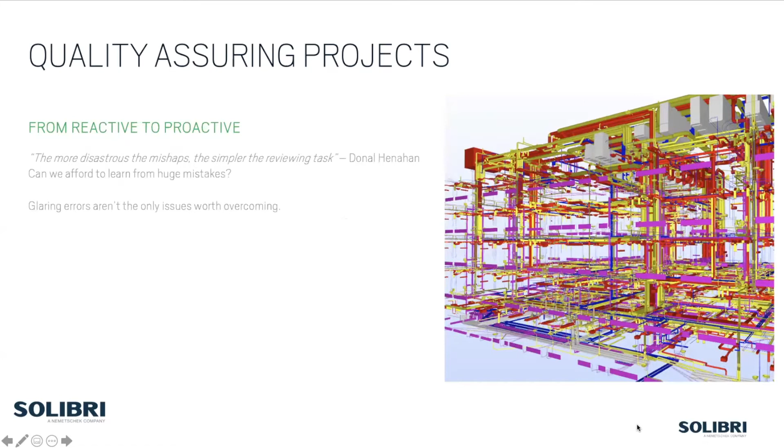From a reactive mentality to being proactive with quality assuring projects - a general quote to share with you: the more disastrous the mishaps, the simpler the reviewing task. But to counter that and to challenge that, can we always afford to learn from our mistakes? Glaring errors aren't the only issues worth overcoming. And is it too late if the mistake's already happened?

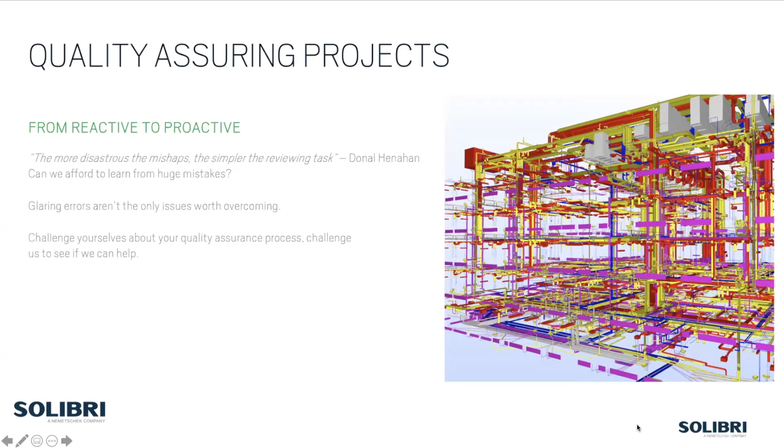So we challenge ourselves about our quality assurance processes, and then challenge Solibri to let us know and we'll tell you if we can help you. When we prepare for the different stages for deliverables, such as COBie, and calculate how much time is used to repeat the same issues across multiple projects, when we actually recap on our previous experiences, just consider the way that we can be better moving forwards.

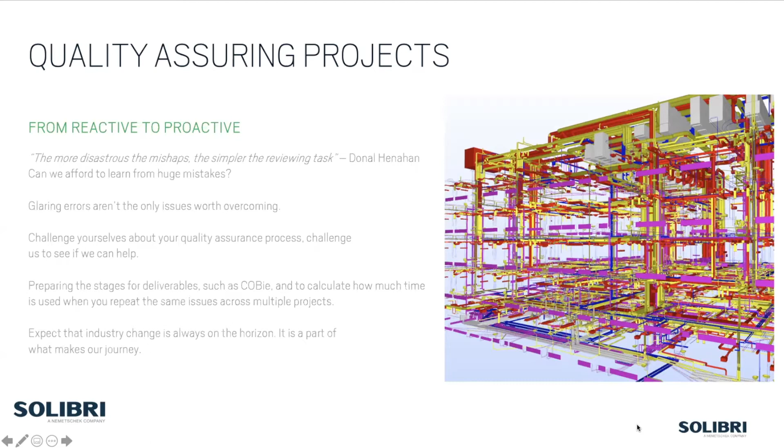And change is always on the horizon. It's a part of what makes our journey. This industry is ever evolving, and always consider that change is on its way.

In the world of BIM, we are creating more data than ever before. If the data is not correct, we are potentially creating more problems than we're solving, and BIM cannot deliver on its promise. I read that word for word because it's a powerful statement, and it really is that simple.

So without further ado, I'll move over to Simon, who's going to showcase and demonstrate just how this works within Solibri Office. Okay, thank you, Isaac. And there we go. So we should now all be seeing the Solibri model checker on the screen.

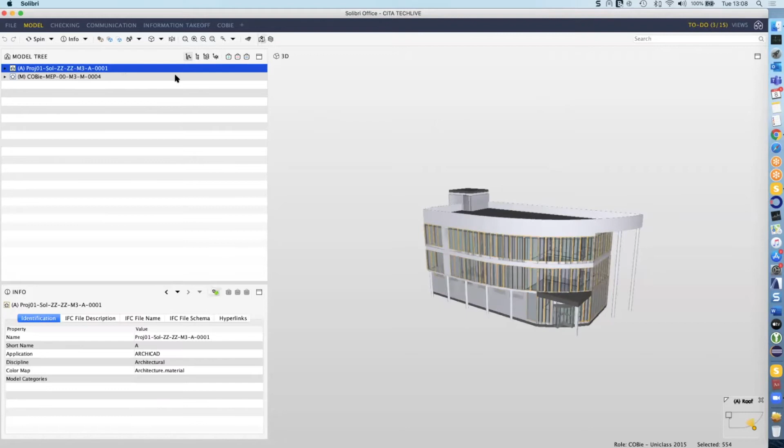What we're looking at now is the building information model. We have two models loaded here: one is the architectural model and another is a mechanical model. So the architectural model is that set of components, and the M&E are those set of components. It's a simple basic model to show the functionality of the Solibri engine.

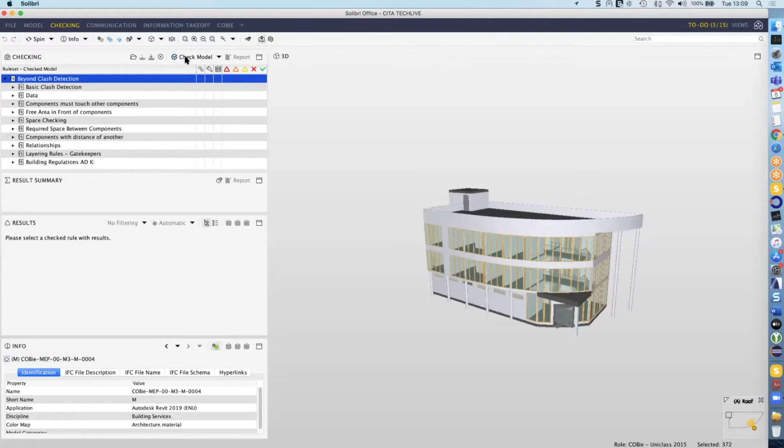It has data related to the components, and when we move to our checking area, we have a list of checks that we can actually carry out. To check the model, we click on the check button at the top here, and it then executes the rules that we have defined within this project.

So we've already discussed—Isaac's already mentioned—about clash detection. Clash detection within Solibri gives us the ability to do things like duplicate checks, to ensure you don't have the same kind of components sitting over the top of each other, as well as components that sit inside other elements.

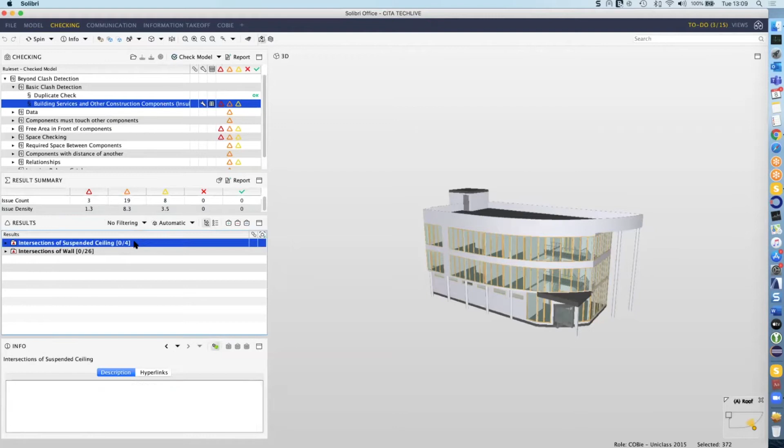But generally, we also have the ability to start looking at, say in this case, building services and other construction components. So a typical clash—when I click on the overview level at the top of these issues, we see all of the data related to what's in this section. So this is all the items related to the suspended ceilings, whereas these are all the items related to the walls.

Now, this gives us an overview against the issues that we're looking at, and we can then drill down into the individual cases if we want to.

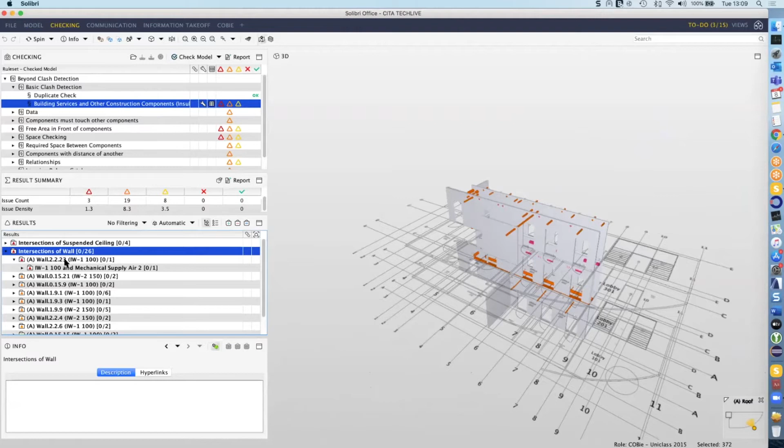So we can go down to one of those clashes here, and when we get down to the level of the triangle, which is the actual issue itself, it then lists the components that are the problematic items. So here's our wall, and we have a couple of duct fittings that are going through that wall component. Now, we also have what's called related components.

Solibri actually has relationships. Those are defined within the authoring system, but come through via IFC to add a much richer view on the model itself. And we'll see how that affects the ability for us to use that within rules as well, later on, using fire ratings.

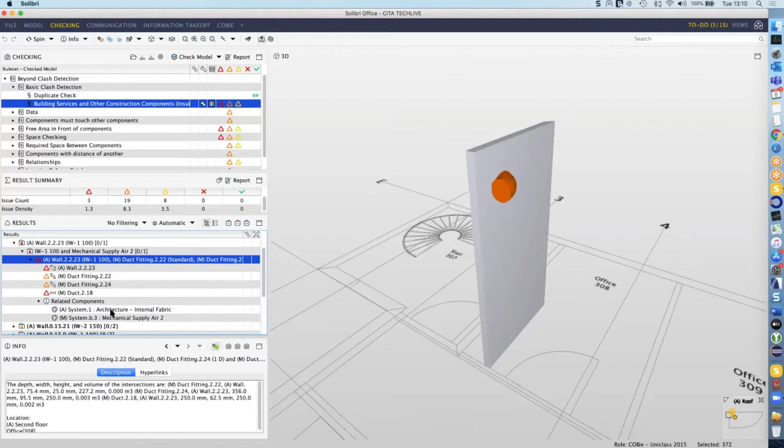So here, what we can do is see the context of the system of where that duct actually clashed with that wall. So we're not just looking at the information as far as an individual clash in the building where it exists, but we can actually start using these relationships to embellish or improve the understanding of what's actually happening within the model.

We also discussed project deliverables, and most of those start off with either clash detection, here from providing a coordinated building, also the ability to then check data. So one of the first things that people need to go and check is that the actual model files themselves conform to ISO 19650.

So we have a rule that we've created here using one of our rule templates, and the rule goes through and checks to see whether our models—which are these two here, with the naming of the models here—conform to that standard.

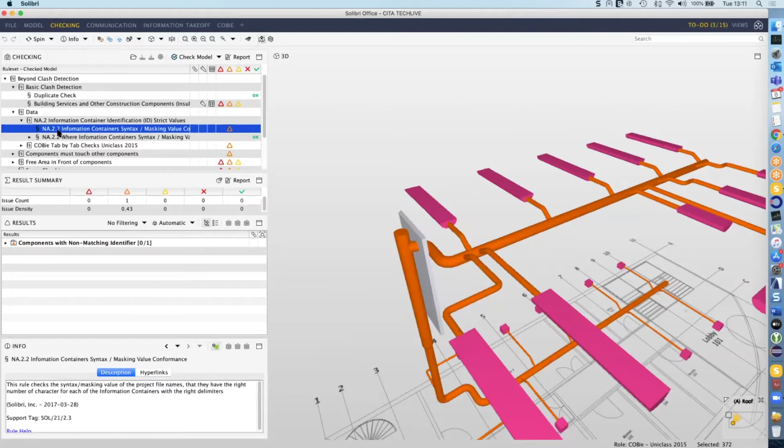So what we've got here is the national annex for the UK, and this is 2.2, and here we're checking the masking value. The masking value says basically that this MEP-based model doesn't conform to the syntax that we've got set up within this rule. So the rule has passed one of these models, and the other one has actually failed.

And then from there we can pass the passed model into the subsequent checks, to make sure that although it's passed the individual syntax—the masking values—each of the individual values that make it up are also correct. So here we might look at something like the available roles, and if we look at the parameters for this, you can see you can then put the allowed values in here.

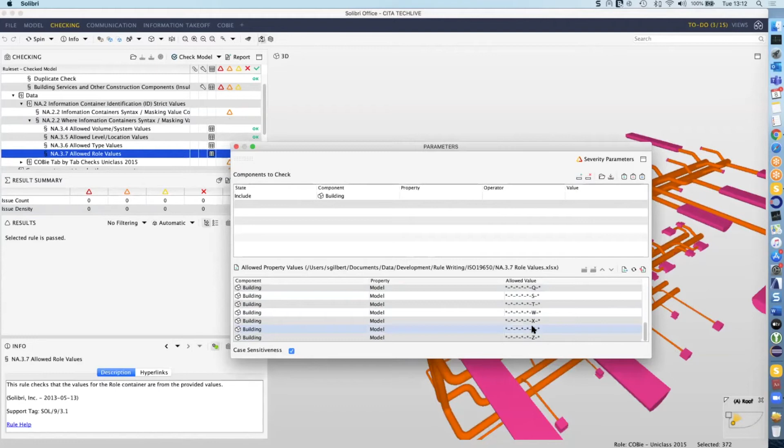We can load those up from a spreadsheet and update them relative to the actual project if needed, adding two figure values and two character values for project requirements. That's data at a very basic level, which should be checked on every project.

A good example of checking other data would be for COBie. In this model we have COBie data, and we've taken a couple of fields we might check for COBie deliverables. One is that it should have an asset type, so we have a rule that checks the values are either fixed or movable for items of this parameter.

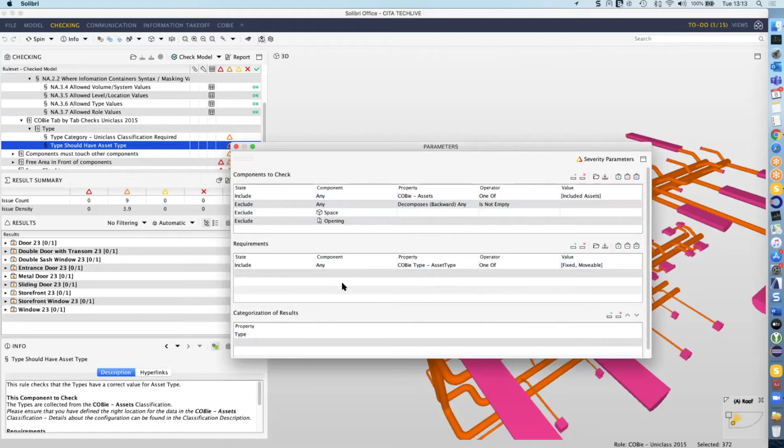We're checking all the COBie assets in the project, filtering them by type rather than individual components. So what we have here are all the elements that don't have the asset type set to either fixed or movable. These are incorrect values at this stage.

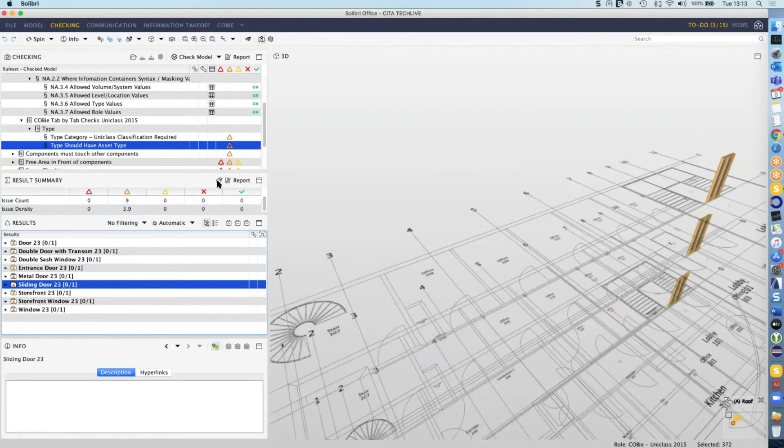For any rule inside Solibri, we get the failures but also the passed elements. The model has checked 208 elements, and you can see it's passed these 56 here. If we select them, these are the components that do have fixed or movable elements against them, so we can interrogate each rule to see what's going on, including the passed ones.

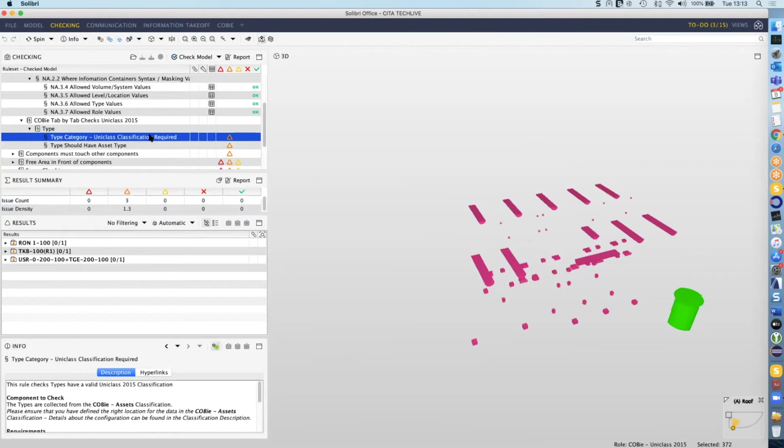This is relatively simple because we're checking a field value that's passed or failed. If I go to something like Uniclass, where we're checking for a classification system applied to components, we check the same set of assets but for this classification. It must be defined, and we sort the issues related to type.

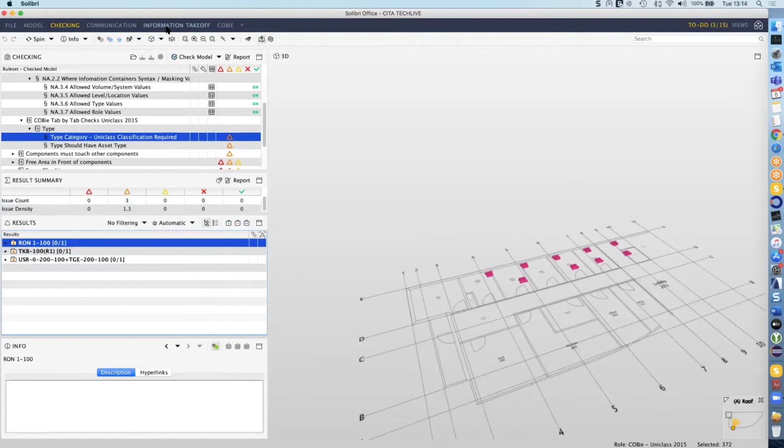You can see it's already failed, and we have three sets of components sorted by their types that don't have a Uniclass classification. That's controlled by our classification functionality, and if we scroll up we have one called COBie Uniclass. If we look at the list that have been classified, these are items that passed because they're defined, and these are the undefined sets of elements.

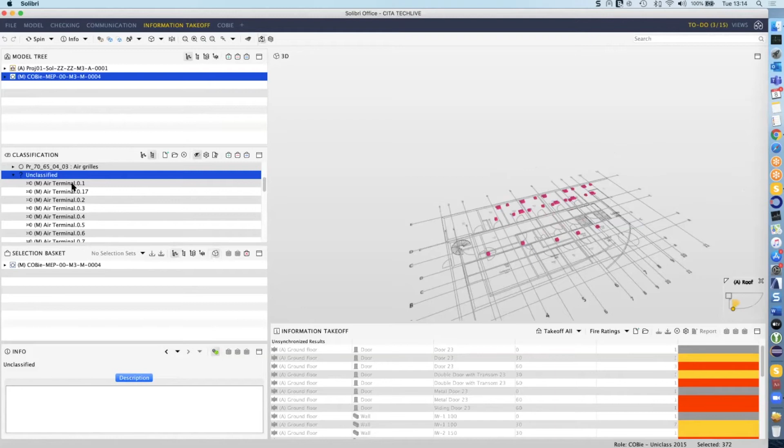The list here is singular and will list each component of those types. But we don't want to create a slide for each issue, because realistically we've only got three issues, as we've already seen. The classification works by checking the set of components, not the whole model.

It goes down these values and evaluates whether it has this as a PR value. When it finds this within the locality specified at the top, which can be changed, it then gives it the actual classification name, so we know it's correct and conforming to the pick list value.

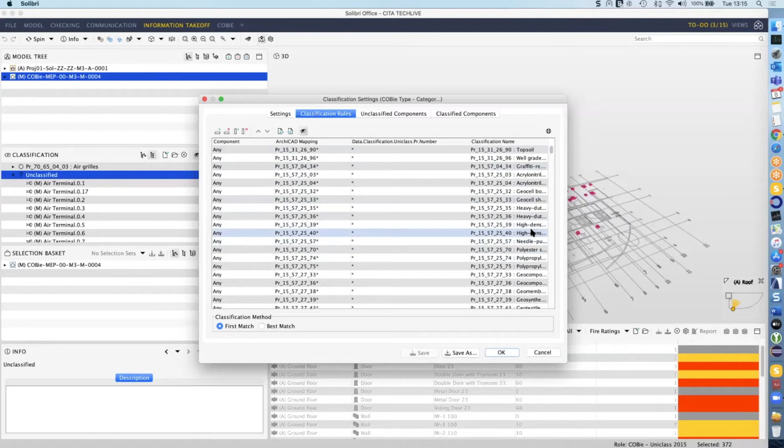Going back to our checking area, we've got our three sets of issues. If we wanted to create slides of those, we can add a description and specify who needs to fix that, and we can do the same for each of these in the same way.

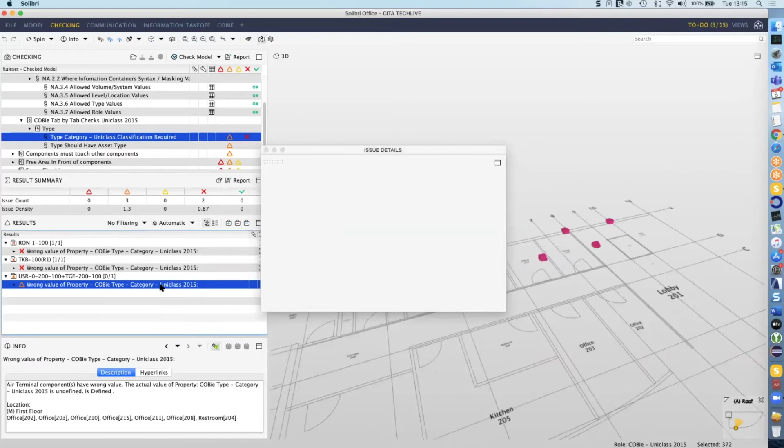With Solibri Office, since we're running this here, you now have auto run available so you could create these dynamically, and we could also generate the presentation dynamically from here as well.

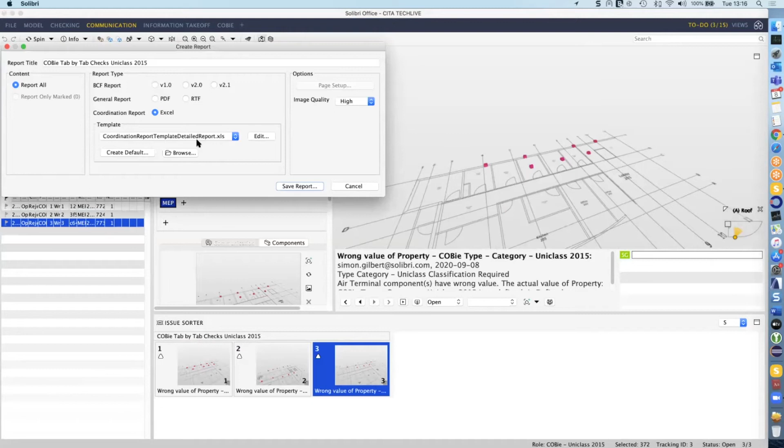So we'll just create the presentation. It creates the three slides here, and automatically we can either synchronize them with an issue management system, report the data out to a BCF report, or generate a traditional styled detailed report just in Excel, which would list that data.

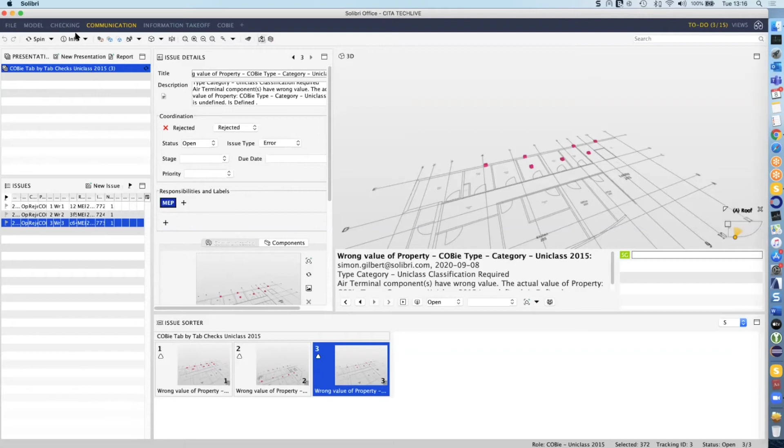So that's the process, and these are linked back to the issue results. When we get a file that updates the model, we should see these being rectified by the relevant consultant, who should have added the PR values for these components as far as the classification. So that's really checking data, and data is relatively easy to check within Solibri, but as we said, it goes a lot further than that.

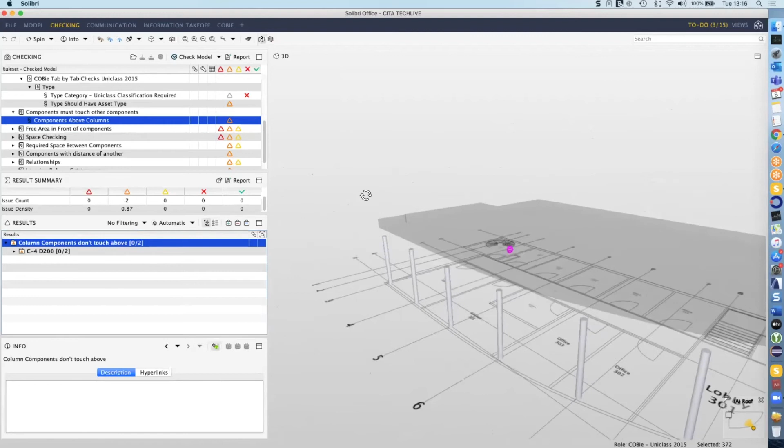We've looked at clash detection, but there are also requirements for certain items to touch other items. Here's an example of a rule that checks that elements in the model must touch other elements. We have columns, and we're saying they must have some kind of bearing object on top of them. This shows us that the columns we see on screen have nothing between them and the roof slab above.

That gap is 450 millimeters. This is also a really good tool if you set the element and the opposing element to 100%, as it can be used as an alignment tool, which is very useful. You don't have to worry about the exact distance, because you can set an allowable amount of overlap or gap between elements. So it can also be used as an alignment tool throughout a project, checking things like columns don't get larger than the ones at the bottom.

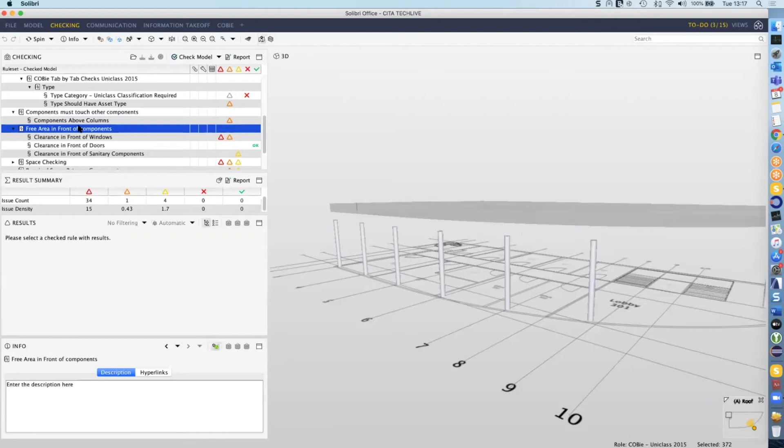So that's checking that things are touching, and now we can move on to checking areas in front of and behind components. We have another rule where we define a box based on the element we're checking—taking the width, length and depth of the box—and we can modify that relative to the original component.

So you can see here we're checking a volume in front of and behind elements. This is incredibly useful for things like doors, where you might have clashes with door swings, service elements, bracing across the backs of doors, or beams cutting across doors—things we see regularly on projects. It's a very useful rule to check we're getting the data correct in the model.

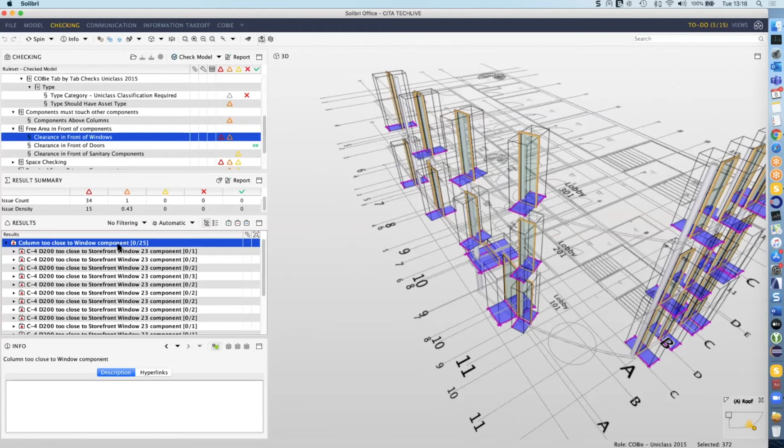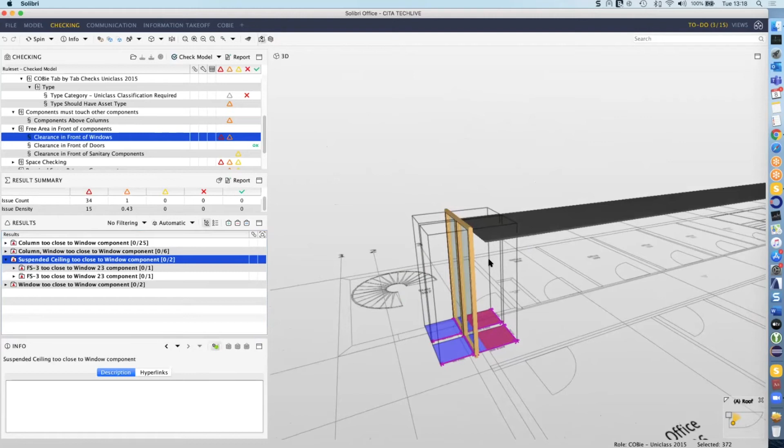A good example is this suspended ceiling, where you can see it's not actually a physical clash with the window units. It projects the amount onto the floor plan to give us a 2D representation of the area taken up by those elements. But if this ceiling was set back a certain distance, we wouldn't see a clash here. It's not a physical problem, but an aesthetic issue—similar to if the windows opened inwards, for instance.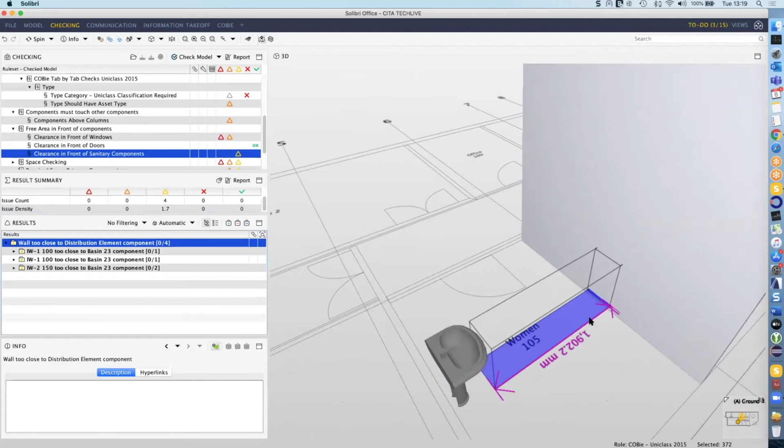This functionality can be applied to almost any element. In this case, I've put a large value in just to show it's checking the area in front of, say, a wash hand basin. It might be an electrical cabinet, or any of those components where you want to check there's free area in front of them.

We also have the ability to check spaces, validating them to make sure the boundaries are correct. In this case, the boundary doesn't match the physical walls around it. That gives us a problem related to volumes, and it would also give incorrect data for things like the schedule of accommodation.

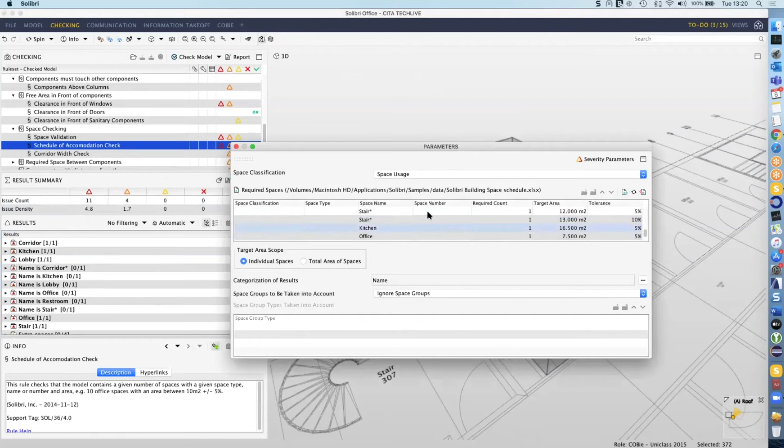We can then run a rule for schedule of accommodation, pulling in an Excel spreadsheet of target values and space names expected in the project, along with tolerances—percentage tolerance or minimum and maximum sizes for those rooms. This gives us a list of failures in the model. For instance, here we have a restroom, and it says there are no spaces of this size, give or take 10%, matching the name restroom.

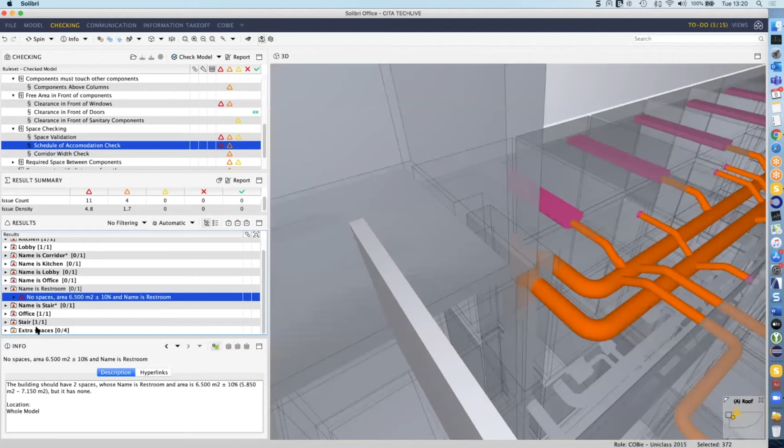That's because down here we have another section called extra spaces, showing men and women. So in this project, where the definition should have been restroom, they've been labeled wrong. Again, we can check that we have the right spaces defined as part of the brief with the schedule of accommodation, just using the rules within the tool and manipulating them.

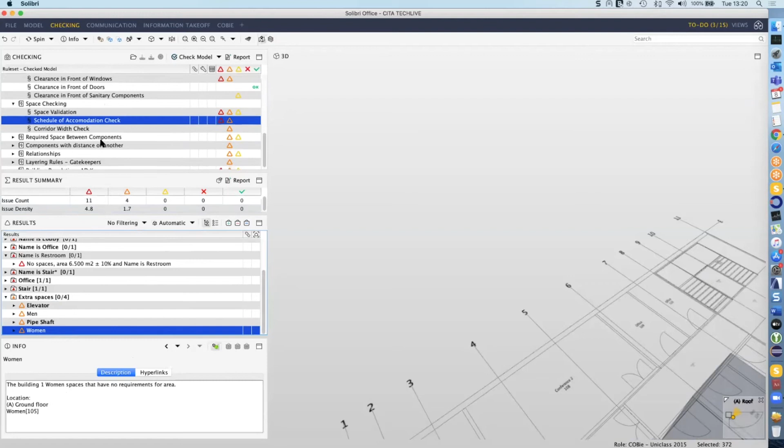Similarly we can check conformance, things like corridor widths—for instance, basic Part M checks. You can see it traces half the thickness we put in as a requirement for corridor widths and puts a boundary around it. Where you see the boundary, that's half the width entered into the rule, and the areas of green are the accessible areas.

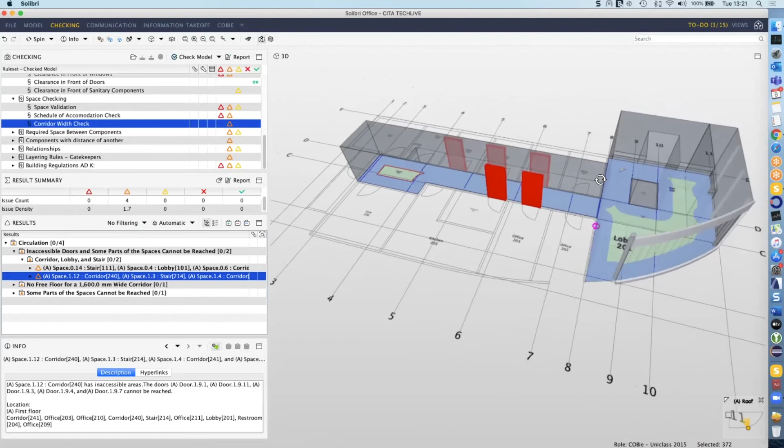What it's actually indicating here is the doors that we see on the floor plan, which are red, are inaccessible because the corridor is too narrow. So it gives us the ability to analyze the actual model. Solibri gives us the ability to visualize the results, not just saying where something's passed or failed, which is really key.

Now we've looked at things like distances between elements, as in items that we actually need, like clear space between elements. In this case here, we might actually require this. Let's look at that requirement - the distance between elements. So what we've got here is clear areas above ceilings.

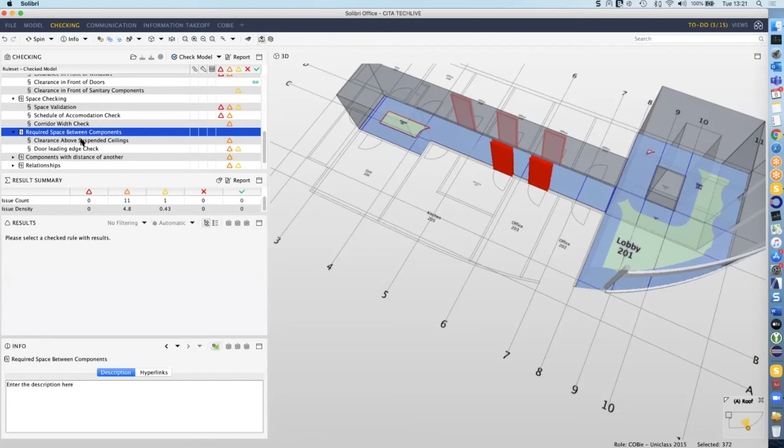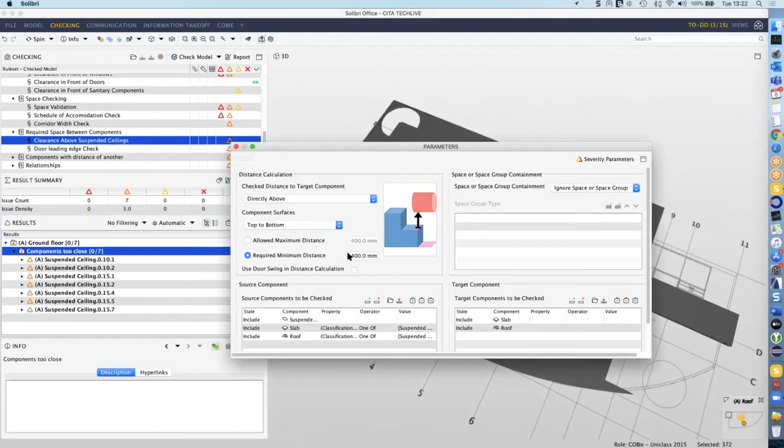If I right-click and look at the rule parameters, what we've got is a rule that checks the minimum requirement. This is saying we need a minimum of 400 mil from the item on the left-hand side, which will be our ceilings, to the actual floor slabs above. We're saying it's going from the top of the ceiling to the bottom of the floor slab, and we need 400 mil. What this is actually showing us is we've got these failures here.

So we've got our floor slab, and if we then rotate underneath the model, we can see our ceiling. There's 7 instances of this, and you can see the minimum gap here is 260. So you might want to combine this rule and say we've got a minimum requirement here, but also change the parameters so that when it gets above 800 mil above these ceilings, we have to check for fire detection devices within that ceiling void area. So we can start stacking these rules, as we'll see in a minute.

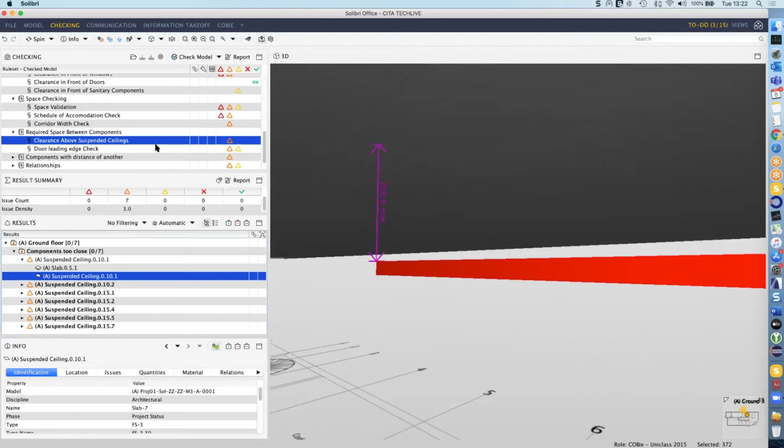Again, checking distances, door leading edge checks. In this rule here, what we've got is a floor plan view, which is checking basically the area of the door leading edge value here that we can see.

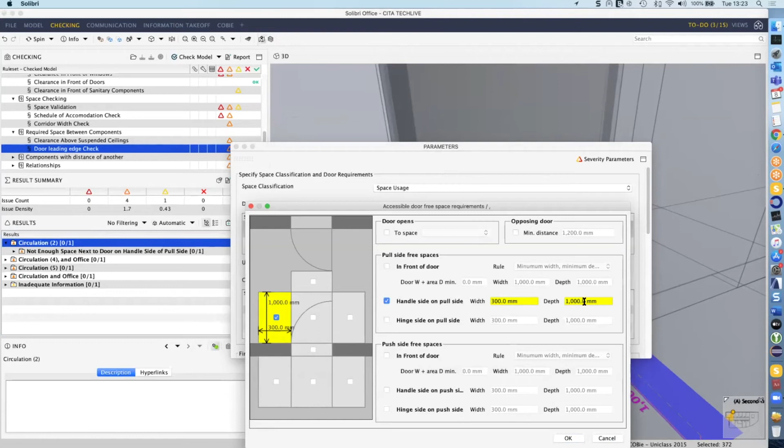The rule gives us the ability to check other data in this rule. In this case, we're checking this parameter, and as we highlight it, it highlights the parameters in the box where we can start changing the values we want to check inside the model. In this case, it's highlighting that the wall is obviously encroaching within that 300 mil distance between there and the line.

So it's giving you the indication, and for each of these problems, we can also create slides to advise the consultants or the people in-house within your own teams to fix these issues. You might want to then check distance between elements on the model to say that we must have a component within a certain distance of another component.

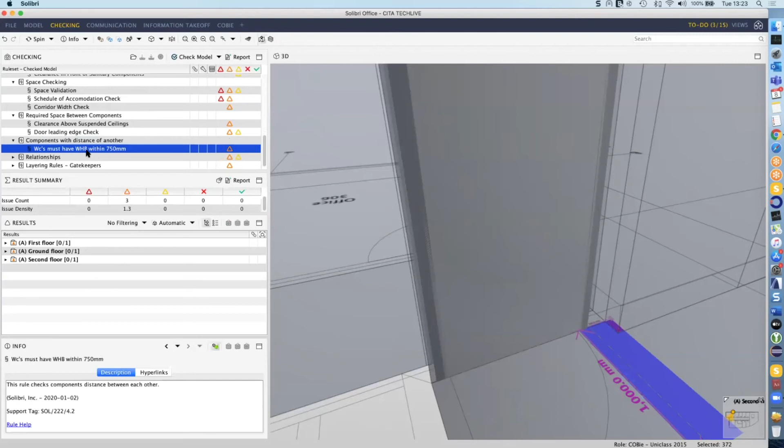So here we actually have a situation where it's checking WCs against wash hand basins. What we're saying here is a WC must have a wash hand basin within 750 millimeters of it.

The actual floor plan takes that shape, projects it down for the object we're looking at, and then measures from that projection over a 2.5D dimension - the 2D dimension here in this case, using the 3D geometry - and it's telling us it's 936 here, when we've actually required it to be 750.

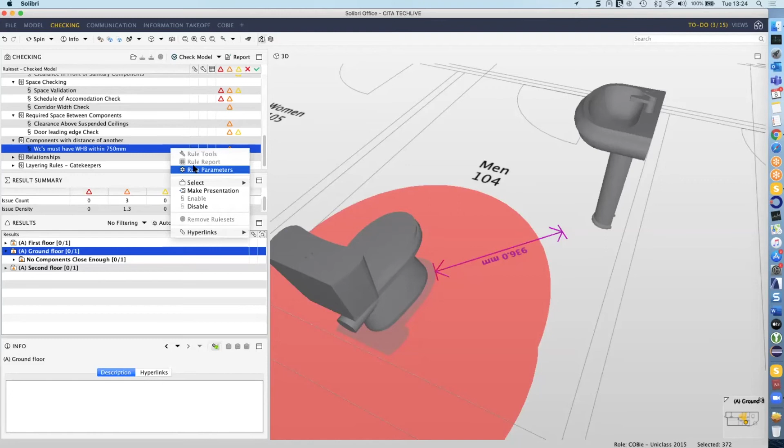If I look at this rule, you can see that we're using 750 here, and we're using a different mechanism with this rule that says horizontal distance between the footprints - we project them down and measure the distance between the two. So that's what that's done.

In this case, what it's doing is actually checking a complete radial sort of tracking on that. If there was a wash hand basin within the women's toilet here, it would say it's passed if it's within this red area. So that's obviously not acceptable.

So what we can do with these is add context related to the spaces within the model, hence checking the spaces are modeled correctly in the first place. What we can do is then restrict this just to the space itself.

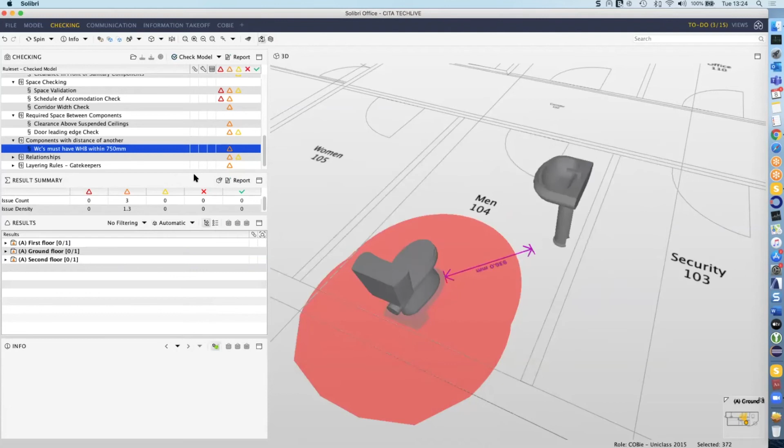If I recheck this model and then look at the actual data now, you'll see that it's now only checking that space. It ignores the rest of the model and just checks the distance in this physical space itself. Now that can be extended.

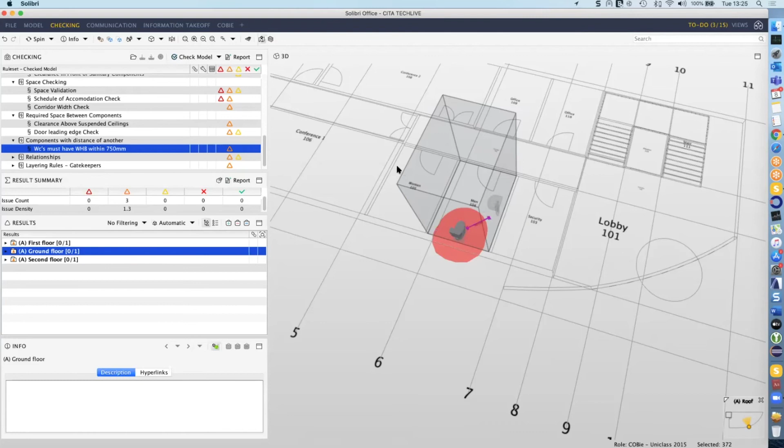So if you're checking things like models for accommodation, flats or apartments, what we can do is start grouping elements. We have a special classification inside Solibri called our space grouping classification, and you'll see here one set up called Other. If we look at the education and conference areas, you can see it takes into account these different areas using the functionality called space grouping.

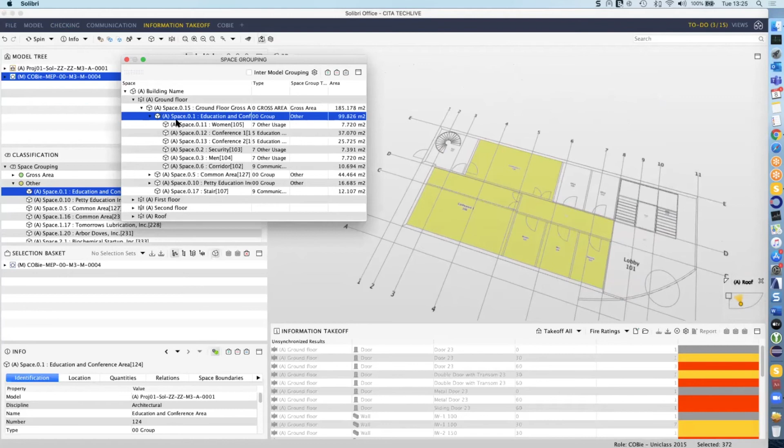What that does is give us the ability to see this data. If we look at that education and conferencing area, we can see it's 99 meters squared, and the spaces that make up that area are shown on the screen now. You can see individual spaces, but it also calculates those grouped areas across the plan, which is useful for exporting data and getting combined areas.

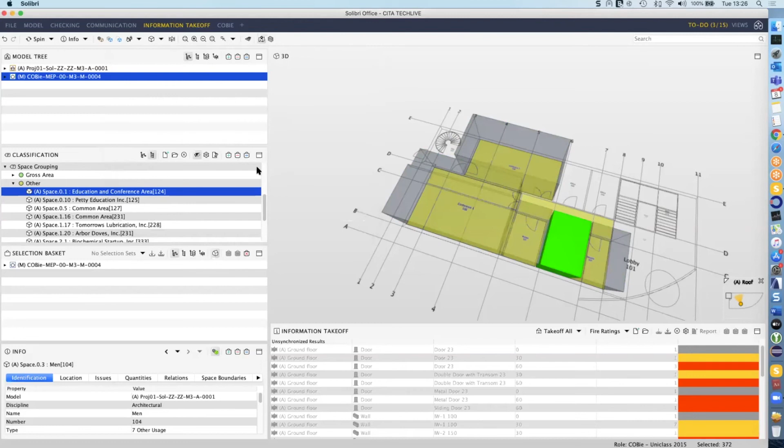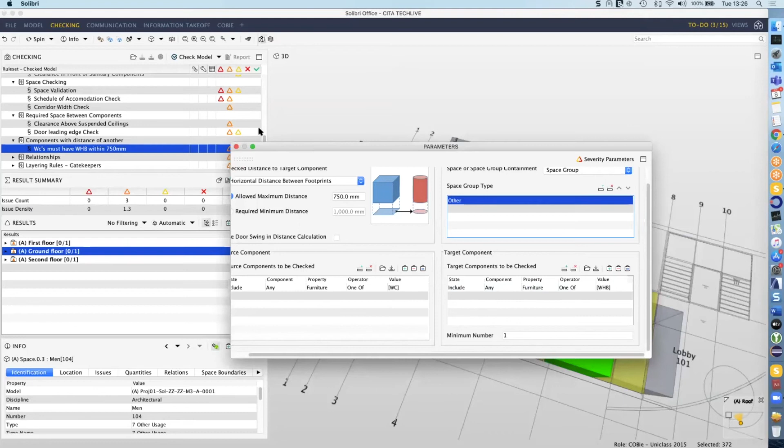But we can use this within the same rule. So if we go back to the rule and use that classification, we say use a space group now, and specify the space group we're going to use - we can drop that down and say we used Other here. At the bottom, we say we only require one wash hand basin for the target elements. If we run the check on the model, you'll see it's extended that area related to that space grouping.

So now it's found 2 wash hand basins, but both of those are too far away from the WC that we see on the screen. Very, very useful using that sort of context with any kind of components, really.

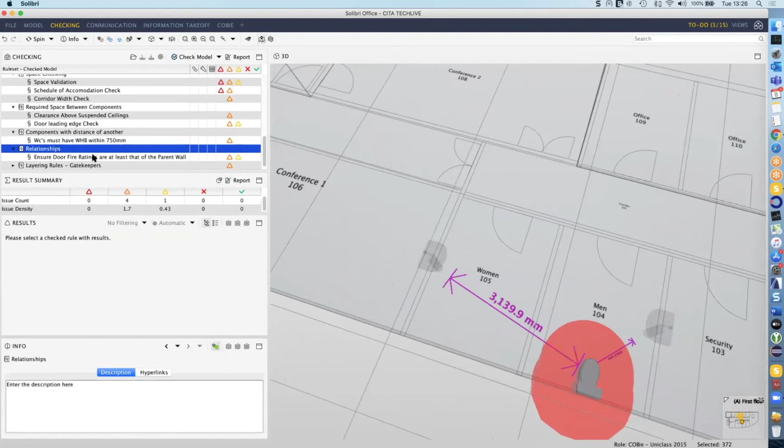I'll take you through 2 other things that Solibri is able to do, and what we'll look at first is relationships. So if we go to the relationships here, I'm going to go back to an information takeoff again, and what I've done is set a classification. The classifications inside Solibri give us the ability to look at the model using the data against the elements.

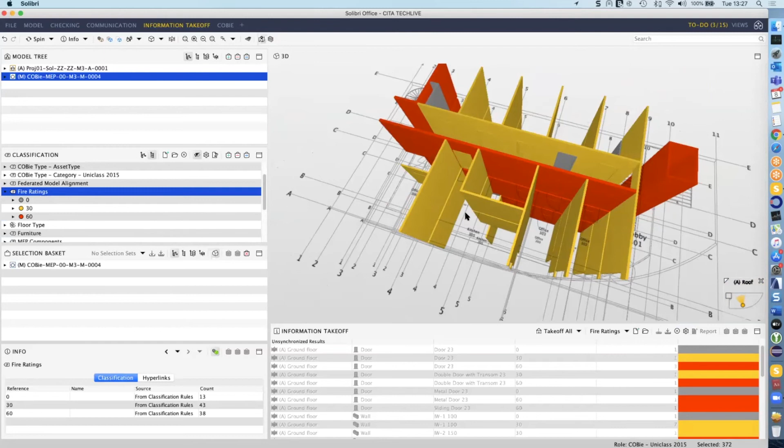In this case, I've created one called fire ratings for doors and walls within the project, and I've color coded those fire ratings to 0 minutes, 30 and 60, because that's what we have in our model. Already we can start to see, and we can also list this out within an information takeoff, where we get these mismatches. In this case, we have a door with no fire rating, and a wall with a 30-minute fire rating. Visually we can see this data really easily, but it helps add context to the actual rule results as well.

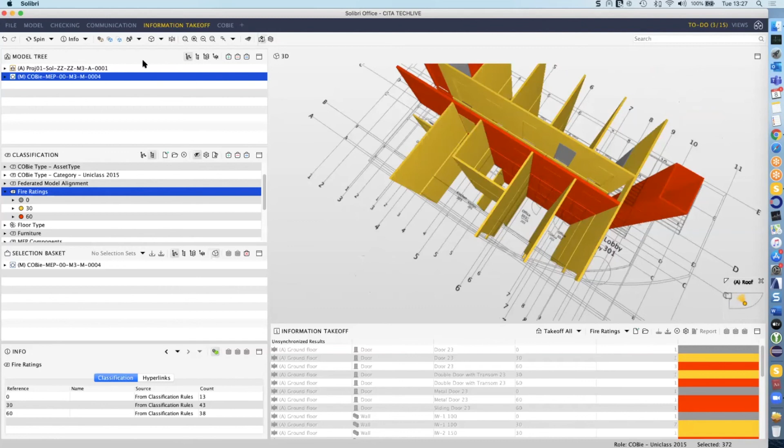So when we go to our checking area and look at our relationships and the rule results, what we're seeing is the data is incorrect. We have a door that doesn't have the right rating - it doesn't have any rating. We have this one here that has the wrong rating - it has a 30-minute rating instead of a 60-minute rating. These rules are checking the parameters of this object against this object using a relationship.

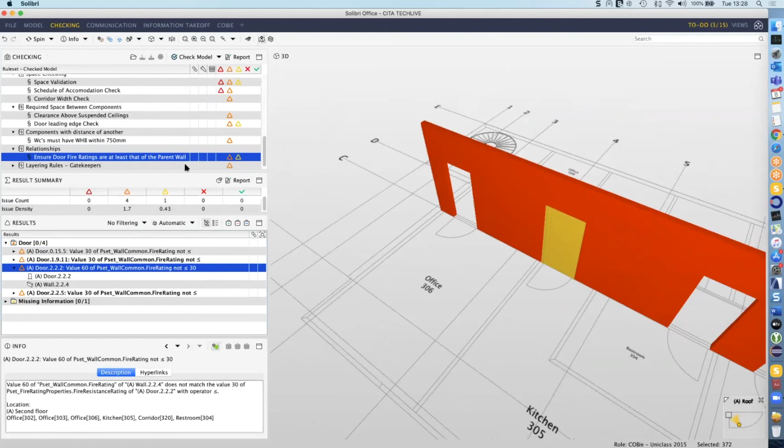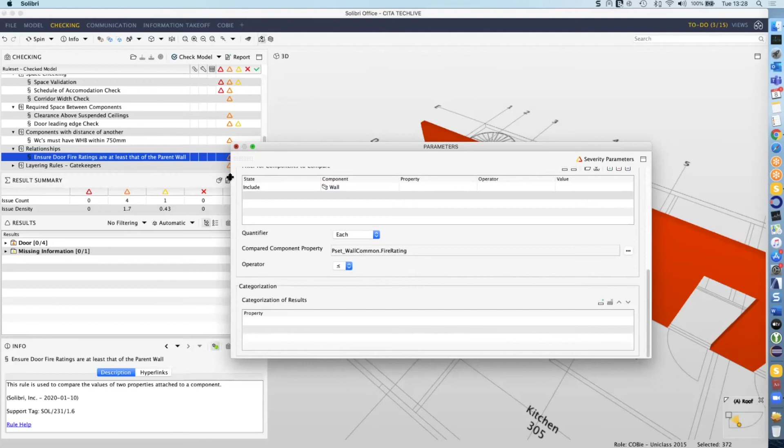If I right click on the rule here to show you how it's configured, we are checking the doors, and checking a parameter called fire rating. We then check the same wall, checking the wall's fire rating, and we're saying it's got to be greater than or equal to, less than or equal to, in this case, to create a correct result for us.

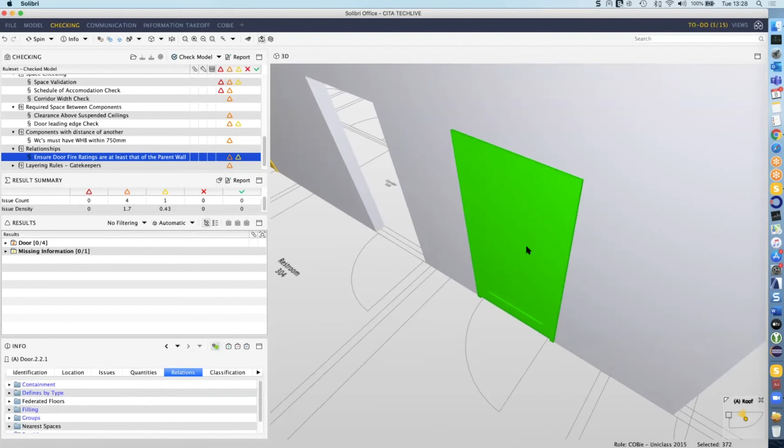Now, if we select the wall itself, we're using these relationships here. So the relationship has a void in it, and if I double click on the opening, this takes us to the filling element, which is the door, and back to the wall. So if we go to the door here, we're now looking at the door information - we're using the data inside this door, using this relationship functionality to check that data against those elements.

So finally, we've seen a number of different templates within Solibri driving different results. What I'd like to do is move over to finally using what's called gatekeeper rules. Gatekeeper rules means we can use any of these types of rules together with each other to refine the information that we're actually seeing.

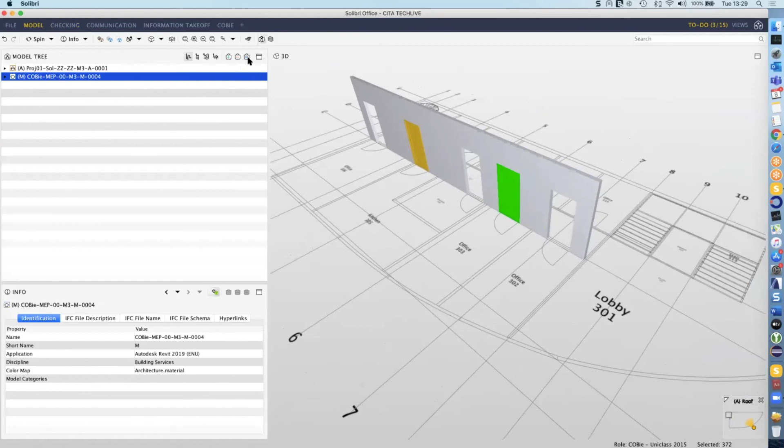Within this rule here, the first rule we might be looking at, we'll show the actual model. So we look at the M&E model, for instance. What I might be doing within an M&E check is verify that electrical conduit doesn't have any ductwork or pipework running in parallel within a certain distance of those elements. So I can go away and check that kind of information.

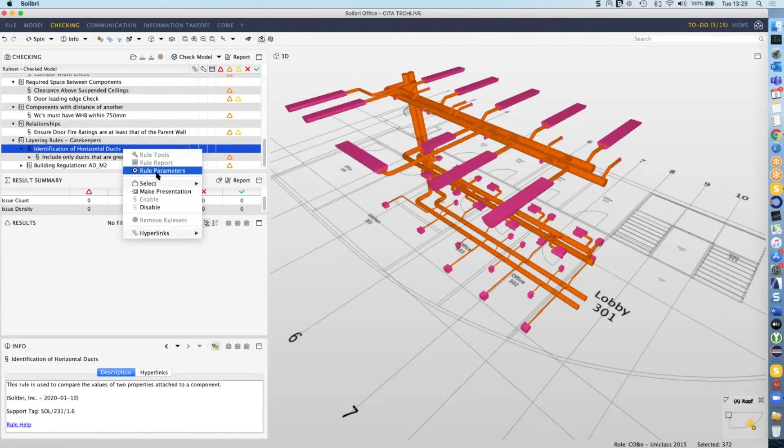The first thing I might want to do is isolate all the horizontal and vertical sets of elements. So the first rule I've created is the identification of the horizontal ducts. If I right click on this rule, I'm using that same comparison rule again.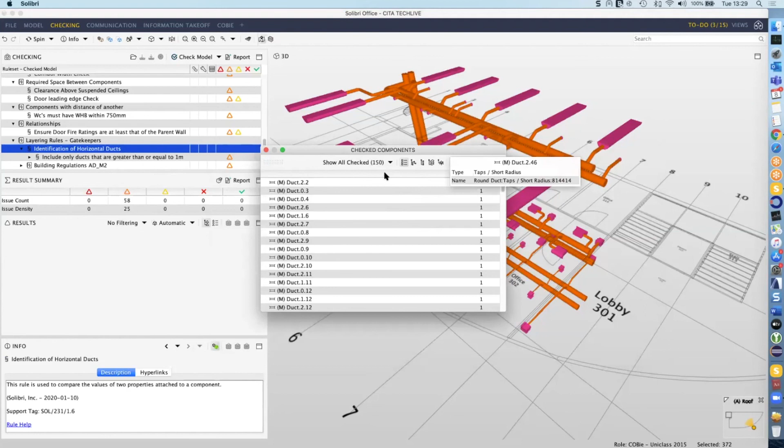I'm saying go and select a duct, set the target value for that duct to be the start offset, and don't factor it anyway. Use the actual check components, set the constraint end offset value, and say they must be equal to each other. What that does in the background, if I look at the data, is it checks these 150 elements here, which we see on screen. The ones that have passed are these elements, so they're all our horizontal ones. The ones that failed, if you see the results, are all the vertical and non-horizontal elements, these angled ones.

So it's very, very simple to actually highlight all those horizontal elements. What we do is we then pass the passed elements to the next rule.

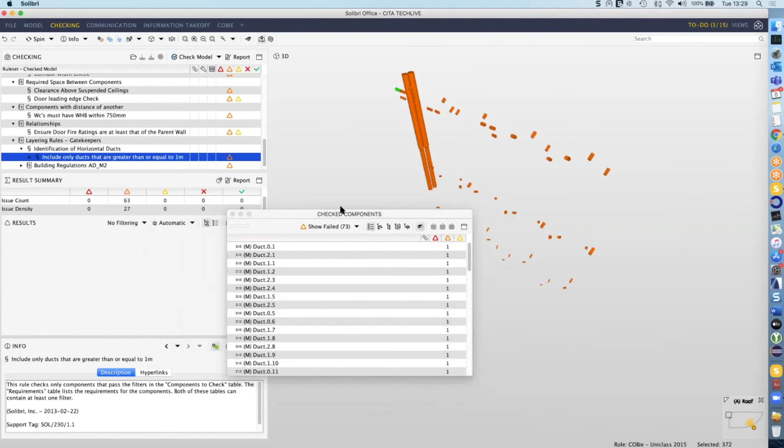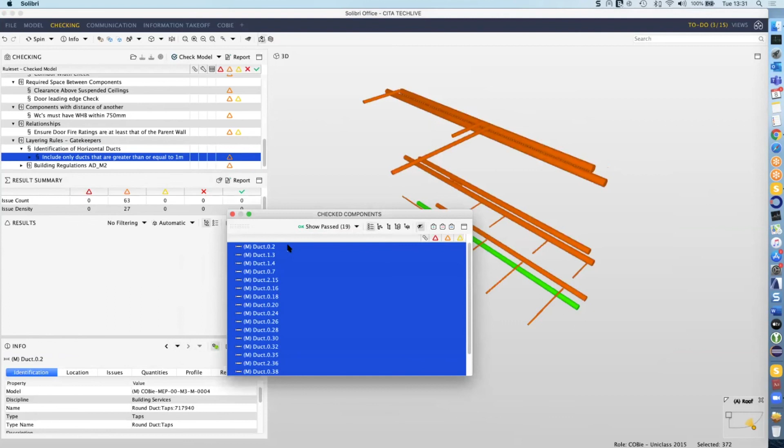With this next rule, we're saying I'm not interested in the small segments — what I'm actually interested in is physical runs of pipework. So I want to look at anything over a meter in size. Now it's gone down to 92 elements, off from the previous one. I can look at the passed elements — these are our longer sections of those same pipes. And if we look at the failed elements, these are all the smaller segments, as you can see.

So we've basically isolated, using a set of parameters, the items both from a horizontal down to a size check, which means we're going to get something meaningful when we go to the final rule here, using our distance check that you've already seen.

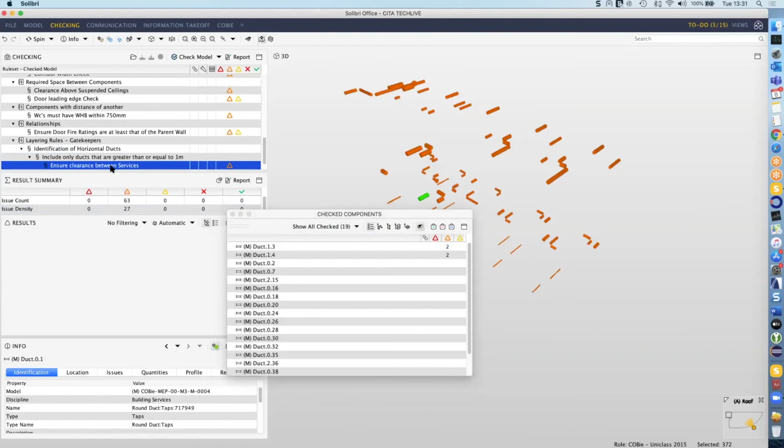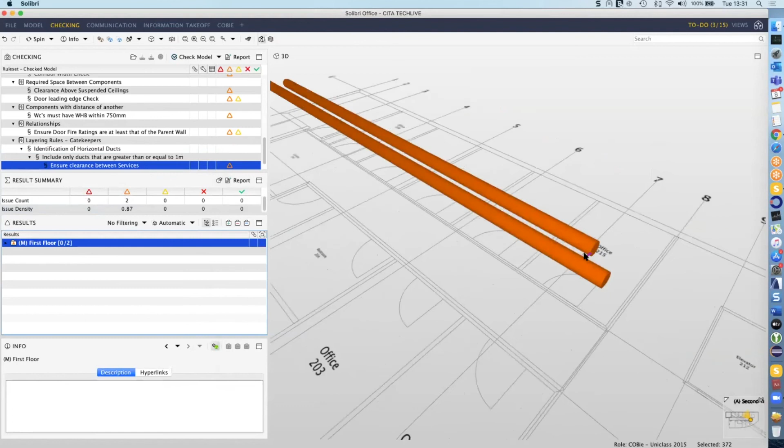So we're now using our distance between elements, but horizontally alongside now. By using horizontally alongside with a certain value, we can check that of the 19 elements here, we've got two failures and the rest have passed. If you look at the two failures, we're automatically seeing that our 200 mil is being breached at this end of the wall, basically anywhere across here, which is 66.8 millimeters. So you can see we can use either the relationships in the model.

We can also use the different rule templates within the model — we have around 60 of those rule templates. We also have an API which enables you to generate your own rule templates for checking your own custom solutions within Solibri. And then you can obviously stack those rule templates, like I've done here with what's called a gatekeeper rule, to pass the passed or failed elements, whichever we're interested in, to the next rule to check other conditions within that model.

Hopefully that gives you a bit of insight into the kind of checks you could actually start to move forward with, to try and address some of these project issues — not only from a basic coordination point of view and conformance of the data in the project, but also any of the requirements needed, or the kind of things that crop up and cause problems time and time again. So thank you very much.

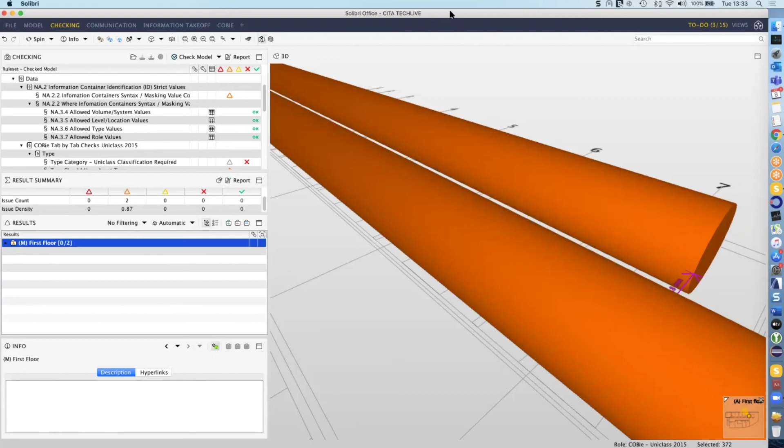To summarize, we're looking at the early identification of issues, improved modeling and modeling standards. We're providing a sustainable quality assurance platform and toolkit for you to utilize against your projects. And naturally, we're looking to de-risk and reduce costs across your projects.